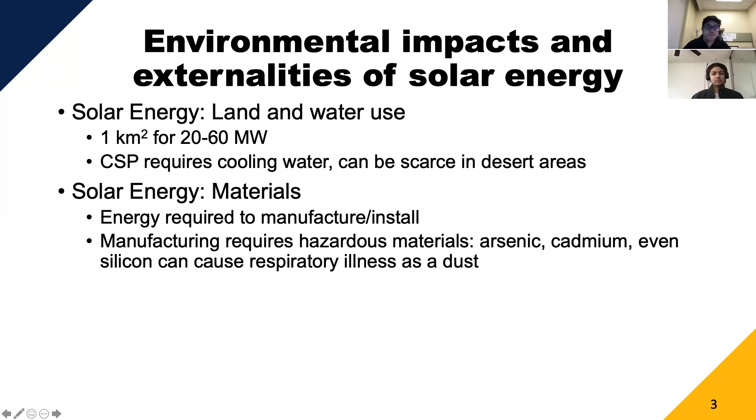This is a common point that some folks will talk about, like bird impacts with wind turbines. It definitely is a thing, although in comparison to other energy sources, it's not as bad. There's actually a lot of wildlife death associated with other means of power production as well.

Siting can greatly reduce a lot of these issues, or help mitigate a lot of these issues.

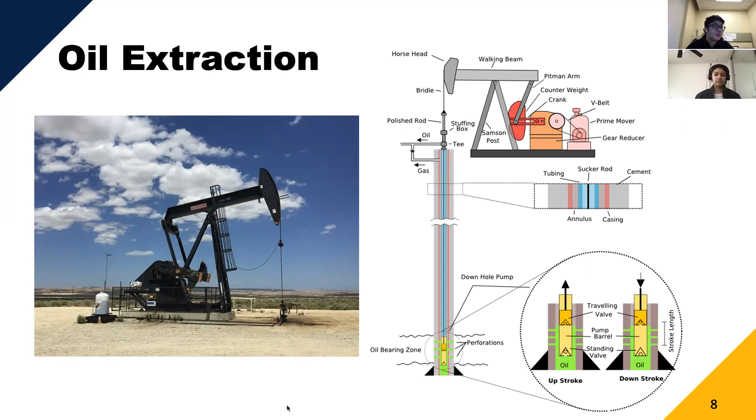That type of oil extraction is known as conventional. It's typically the highest quality and lightest oil. When we talk about lightest oil, we'll see what this means in a little bit, but generally that means you have better derivatives for transport fuels such as gasoline and diesel.

Unconventional oils are a lot heavier, which means the carbon chains within these oils are a lot longer and often tar-like, a lot more difficult to recover since the production and refinement of these resources requires a lot more money inputs. For that reason, the vast majority of current oil production is conventional oil.

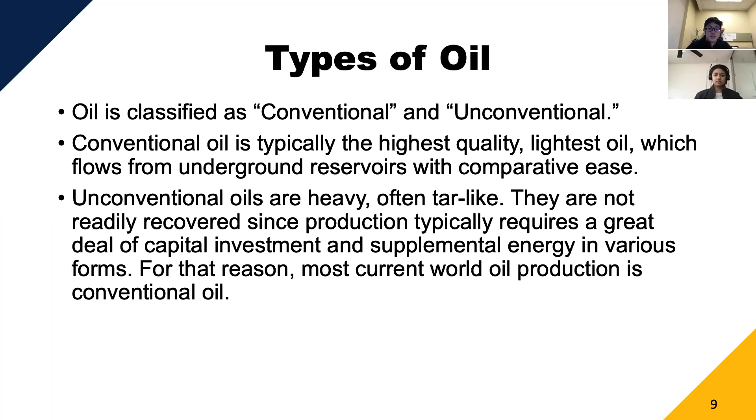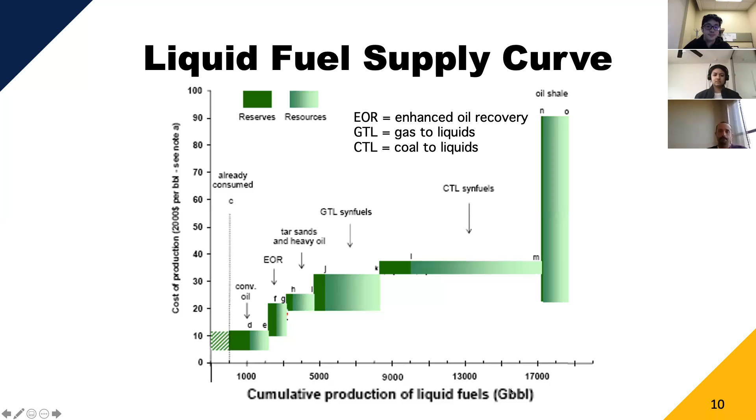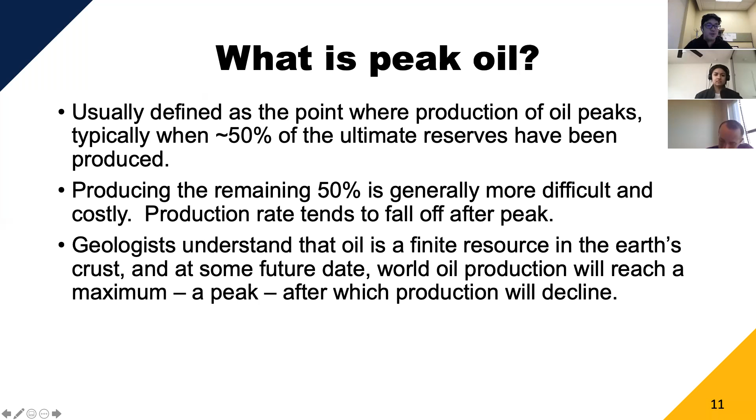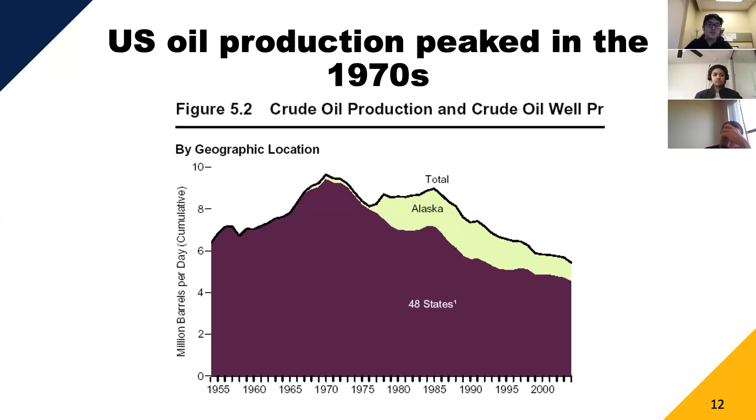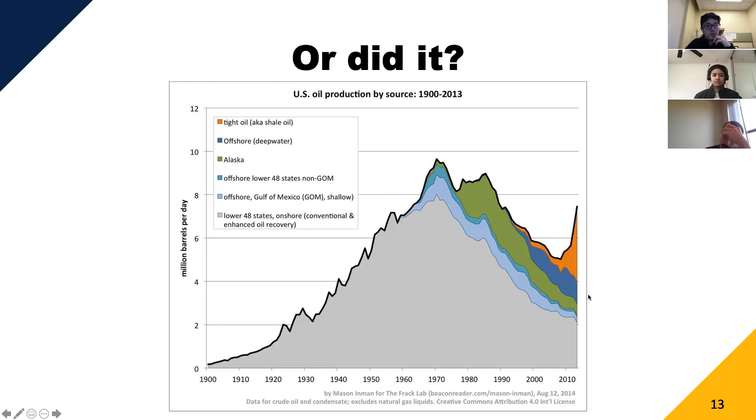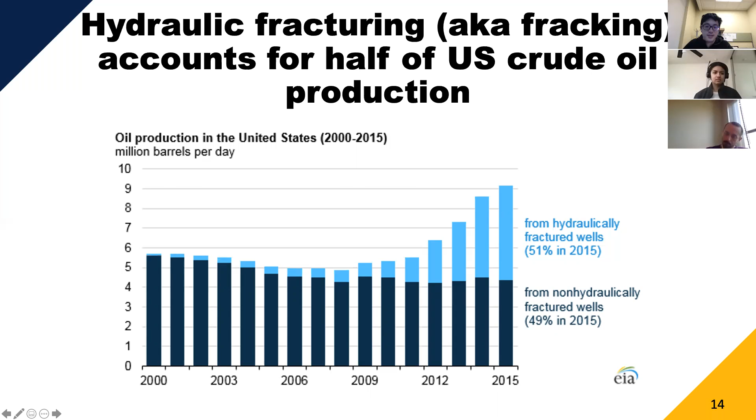One of the things to think about in terms of sustainability is how issues related to conservation can postpone peak oil. This sort of question is particularly important for folks in the oil industry, since it directly affects a lot of their bottom line.

I see a question. Could you go back to the previous slide, where you relate the shocks to oil price shocks and recessions? Can you explain that a bit more? Do oil price rises determine recessions, or?

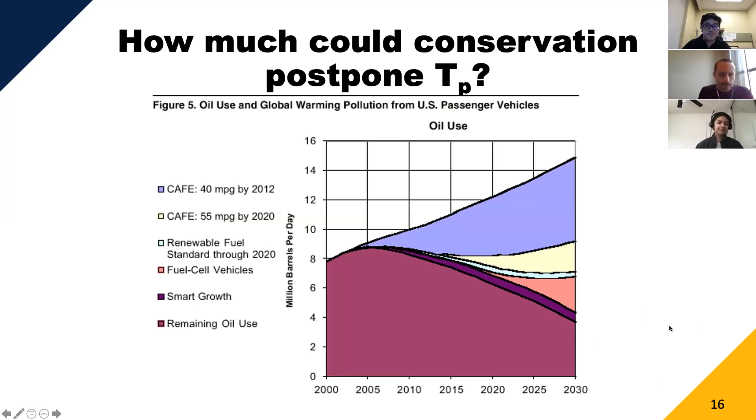But following that period, 2020 to 2021, while passenger travel has not quite reached 2019 levels, freight demand has actually gone up to be quite a bit higher. A lot of people hypothesize that has to do with an increase in deliveries of goods and services. So there was an 18-year low due to coronavirus, but then historic highs now.

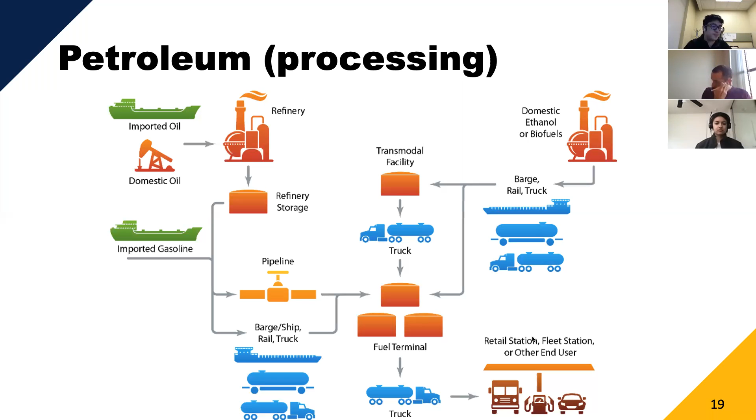Petroleum or crude oil is on average composed of carbon compounds - alkanes, naphthenes, aromatics. We take this crude oil and refine it into several outputs depending on the composition of the starting crude oil. So pentane to octane, carbon chains that are 5 to 8 carbons long, you get gasoline.

And the average barrel of oil is going to yield about 20 gallons of gasoline. This will vary depending on the composition of your starting crude oil. Just as a note, a barrel's volume is 42 gallons, so just about half of that will be gasoline.

Longer carbon chains are thicker and more viscous. This is C9 up to about C16, which gives you diesel, kerosene, and jet fuel. The properties of these fuels are slightly different from gasoline—they're actually more energy dense, and that's why you use these types of fuels in certain applications.

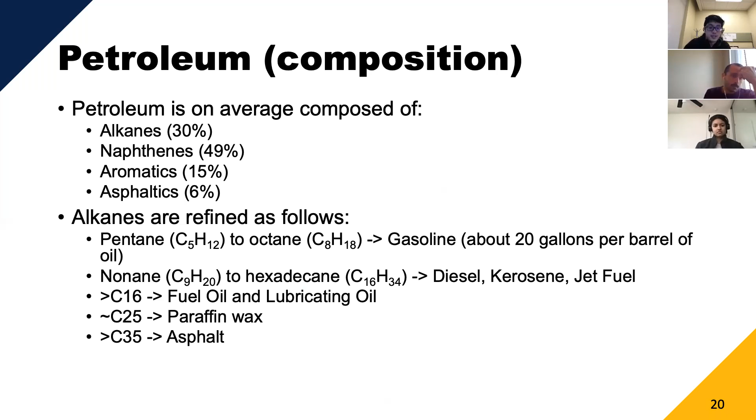Gasoline itself is a homogeneous mixture. It's a homogeneous mixture of small hydrocarbons, anywhere from 4 carbons on the smaller end, usually around 6 to 8, but the range of 4 to 12 can exist, with the really small ones and larger carbon chains being a lot rarer.

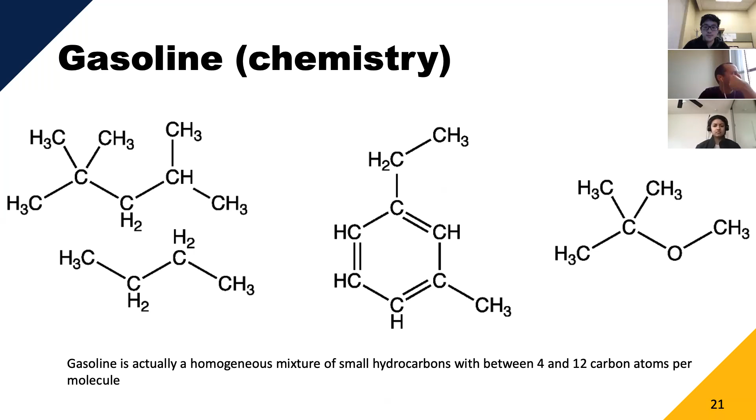Gasoline has an energy density of about 45 megajoules per kilogram. Reserves of oil are around 1.6 trillion barrels, so that's a little less than half of that in terms of gasoline. Note that we consume about 4 times 10 to the 11, or 400 billion gallons of gasoline per year—an astoundingly large volume.

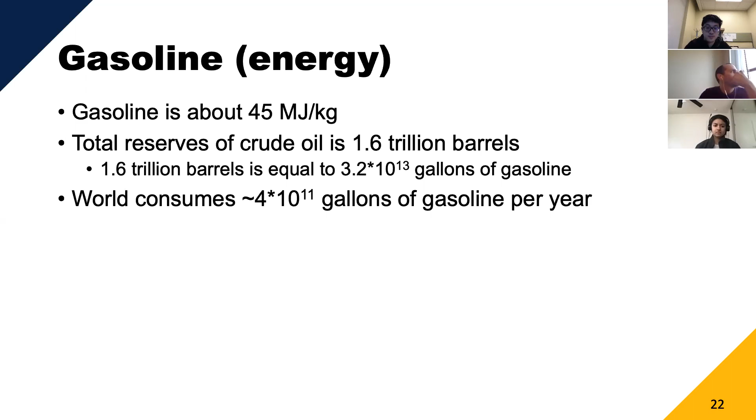Thinking about thermodynamic cycles for petroleum, for gasoline—this is an example of an Otto cycle, which goes through these phases. This is in contrast to the Rankine cycle and Brayton cycle we discussed before. Real world engines don't follow exactly this procedure; it's a bit more complex, but this is an idealized representation of a typical piston engine. The efficiency of these things in theory can reach as high as 60%, but in reality your average efficiency is going to be substantially lower.

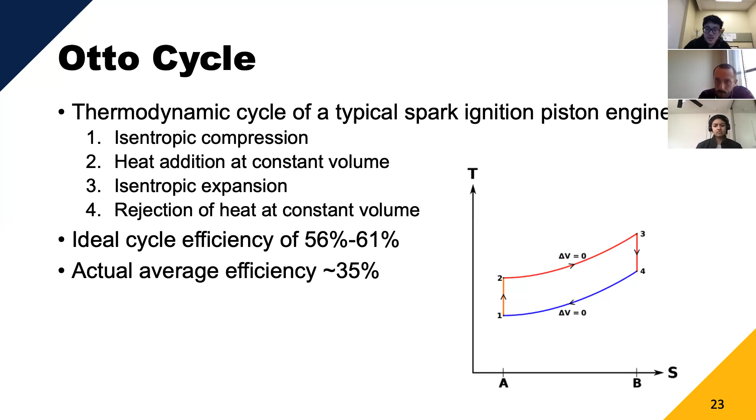Let's talk about how a car engine works. This is a diagram of a typical piston, comprised of 4 stages, hence the 4-stroke cycle. In the first stage, the intake stage, the piston depresses downwards. Simultaneously, the intake port opens up, allowing air to get sucked into the piston. At the same time, the fuel injector will aspirate your gasoline into the piston, since you need a mixture of both fuel and air for combustion to happen.

In the second stage, both valves close for the fuel intake and fuel injector, and the piston moves up and compresses it. Compressing the fuel-air mixture together allows for a better, more efficient combustion to occur.

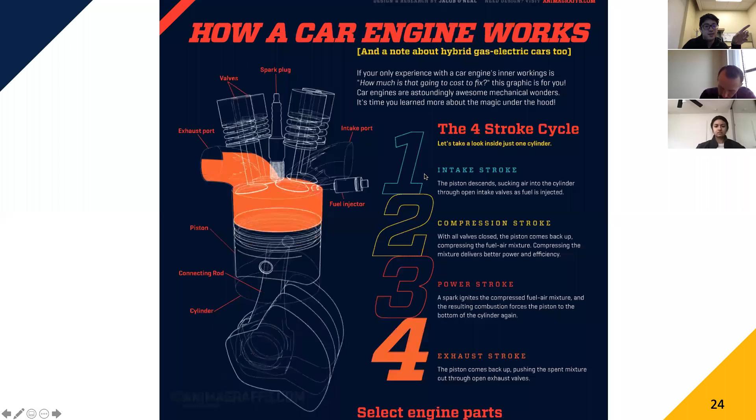The third stage is where you're actually extracting work energy. You've got a spark plug, and what that does is ignite the air mixture, creating an explosion inside the piston. That explosion pushes down your piston and causes the assembly at the bottom to rotate.

In the final stroke, your piston comes back up, and in this phase it opens a different valve going to the exhaust port. As that happens, it sucks out all of the combustion byproducts that happened during your power stroke.

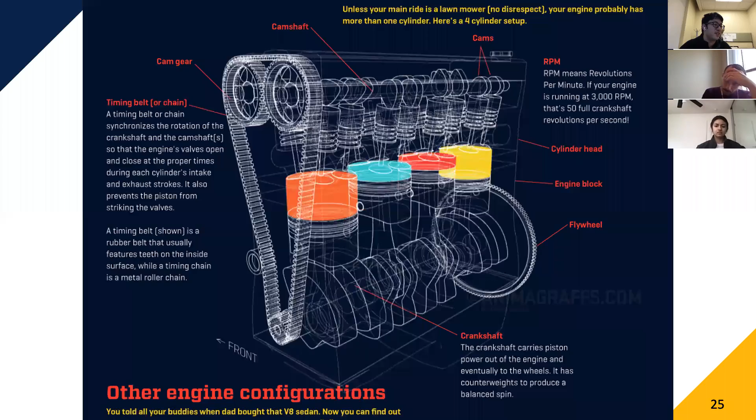These days we use fuel injectors that spray gas into the cylinder at exactly the right moments. If you've got a really old car, you might still have a carburetor, which is kind of like a physical dripping mechanism used to introduce fuel into your cylinders. That's a bygone technology now.

I'm sure everyone has seen this: when you go to the gas station, you see these fuel octane ratings. This rating actually refers to the chemical composition of the gasoline you're putting in. The idea is that higher octane ratings tend to resist something known as auto ignition. So what happens is, if we remember back to that piston diagram, let me go back to it really quick.

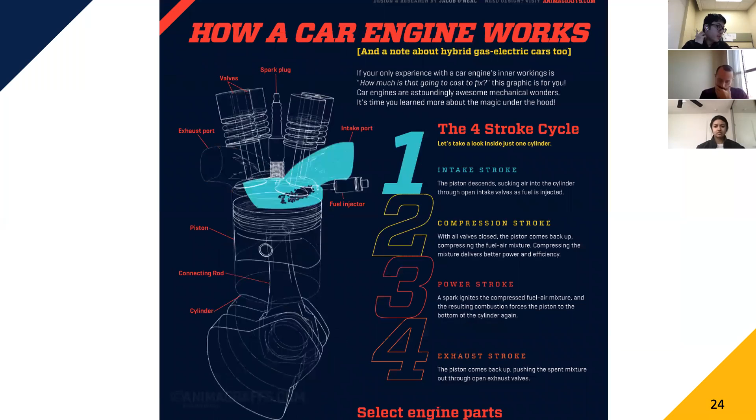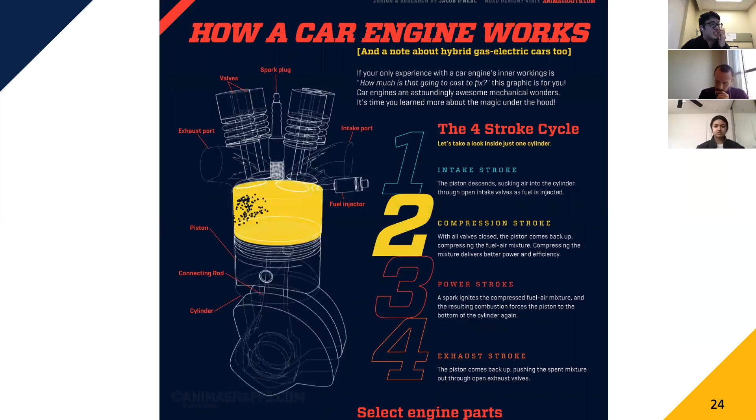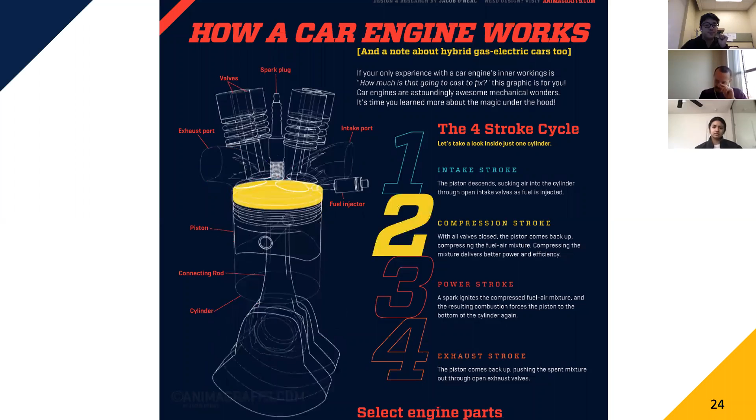One of the things that can happen is, you're basically blowing up gasoline inside of this piston all the time, so the temperature is actually fairly high. In stage 2, during the compression stroke, as it moves up and pressurizes the fuel-air mixture, if the temperature is high enough, it can undergo auto ignition, which combusts the fuel-air mixture before the power stroke. Now the engine is operating not in sync with what you want, and that process is known as knocking.

This really only occurs with fairly high performance cars, where the engine will reach temperatures and have the ability to compress the fuel-air mixture to the point where auto ignition happens. So really only certain types of cars should be using higher octane gasoline. If you're filling up a Honda Civic or something with premium fuel, it's kind of just a waste of money.

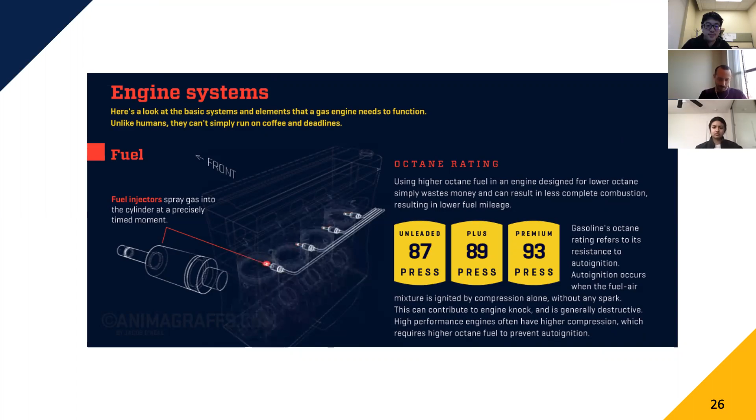So remember that combustion requires oxygen. So imagine the volume of fuel that you're combusting and the corresponding amount of oxygen that would be required. For every carbon atom, you are essentially requiring a single molecule of oxygen gas to properly combust.

So the ratio of gas to oxygen an engine needs is about 1 to 14. Each part of gasoline requires 14 parts oxygen, which means that for a typical vehicle with a 20-gallon tank, your engine will take in 20,000 cubic feet of oxygen. So it's quite a lot.

And then you can think analogously that everything's coming out as carbon dioxide, so quite a large volume of carbon dioxide being emitted.

There is oil that's required for lubrication, making sure that everything is properly lubricated. If you don't have oil, you can degrade the engine and overheat it.

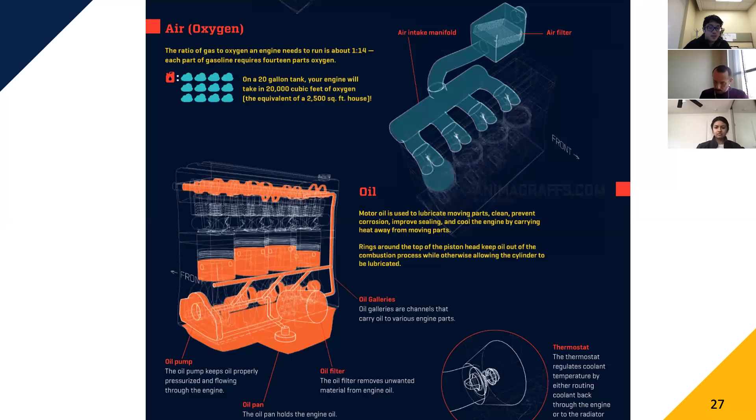Cooling is an important process, that's why you have engine coolant. This comes from your radiator that helps maintain the temperature of the engine and the critical components, both at high temperatures and low temperatures. So there's a whole series of cooling devices to make sure your engine doesn't get too hot when it's operating.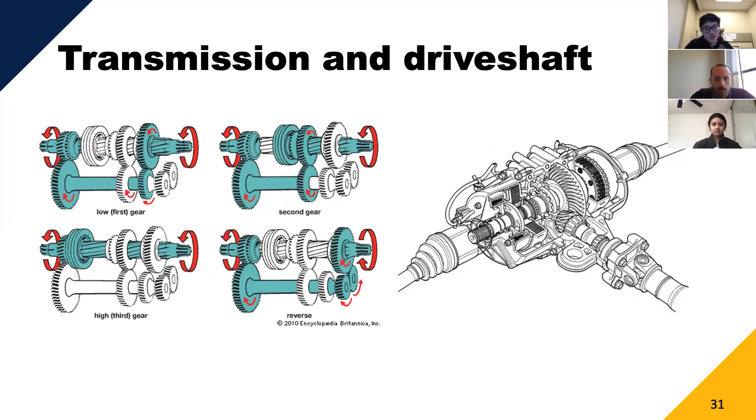So why am I getting into all this detail about the operational aspects of your gas car? I think it's somewhat interesting to know about since so many people rely on it, but also to serve as a contrast for how newer alternative fuel vehicles work. Thinking about electric vehicles and hydrogen vehicles, if you've seen electric vehicles out on the road, they look like your average car. But what's under the hood is vastly, completely different than the world of internal combustion.

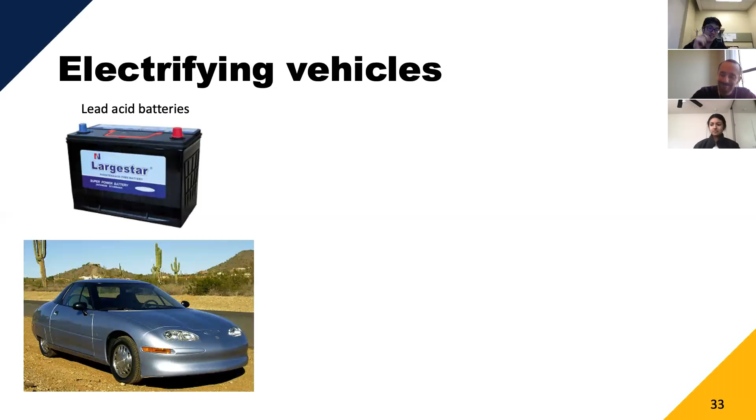The next evolution in battery technology is known as nickel metal hydride. When we think about the Toyota Prius and hybrid vehicles for a long period of time following the Prius, I'd say for the next decade and a half, they used these batteries. These nickel metal hydride batteries are better in terms of power and energy density, but still not enough to solely power the drivetrain of a vehicle, at least not for long distances. But they're great at allowing hybrid vehicle technology to flourish.

And lastly, lithium ion batteries, the commonplace battery for modern day electric vehicles, with much higher energy and power density, allowing for explicit powering of your vehicle's drivetrain.

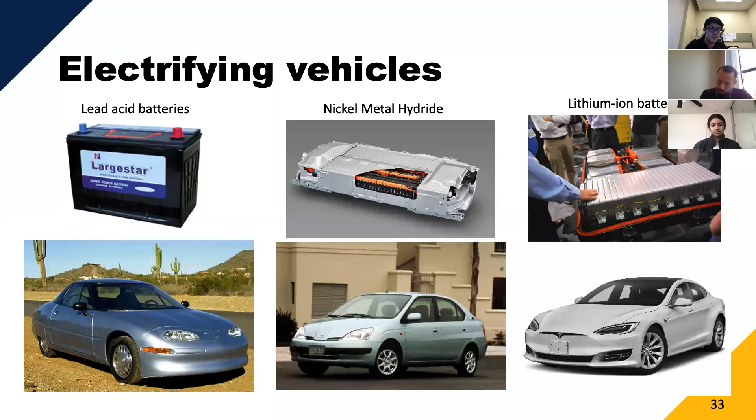So how do batteries work? The important thing to remember is that batteries are a form of energy storage. They don't actually produce energy themselves; you have to put in energy to get energy out. Essentially, you have an anode, cathode, and electrolyte, and it uses the potential energy difference in the concentration of positive versus negative in your anode versus cathode to allow for production of electricity as you let electrons move through your circuit.

Your lithium ions essentially move back and forth in the electrolyte, and this movement is what allows electricity to flow.

Think about how energy dense gasoline is - about 45 megajoules per kilogram. In order to compete against that, this new form of energy use has to hit a sweet spot in terms of the size and weight of the batteries, which was one of the large issues in earlier generations of electric vehicles. And it's still an ongoing issue, especially as we think about electrifying heavier and heavier vehicles.

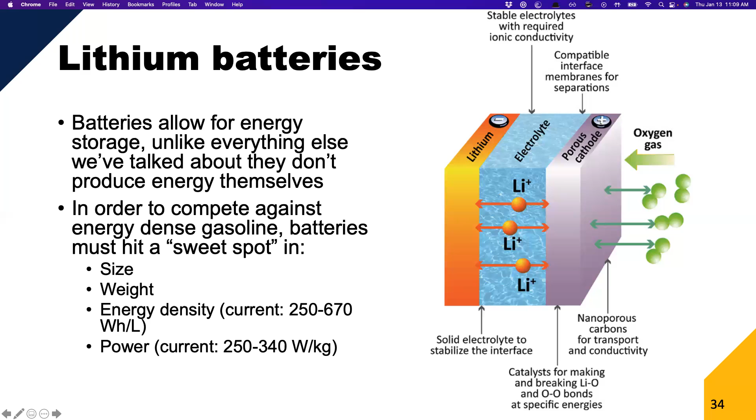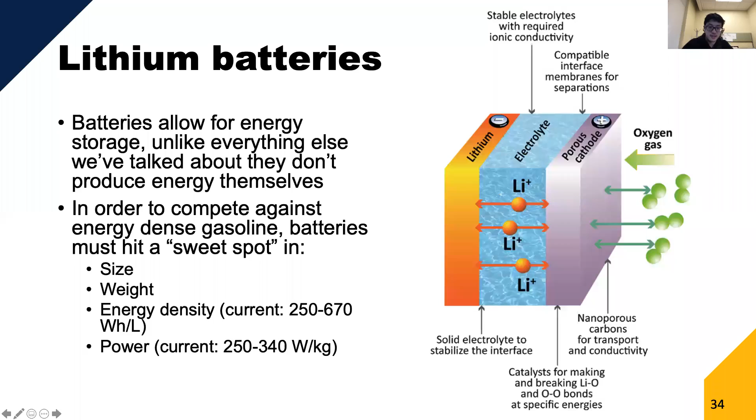Okay, so let's continue onwards, thinking about lithium battery economics. This is a pretty famous paper that came out in 2014. It was published in Nature Climate Change or Nature Communications, one of those two. And essentially what the authors of this paper did was they went around and asked a bunch of experts and a bunch of industry experts.

You can see they talked to companies like Nissan and Tesla and looked at other research journals. Basically they did this compilation of elicitations to understand where the price, or the cost for batteries, was per kilowatt hour in the past. And so you can see this broad range of costs.

They also tried to elicit future costs from these experts, both researchers and industry leaders. You can see that in these triangles, showing where we expect these costs to be in the future. At the bottom of this plot, there's this red shaded area that starts at $150 per kilowatt hour. If you were embroiled in the world of EV research at the time, this $150 per kilowatt hour at the battery pack level is the magic number for what battery costs would need to be in order for electric vehicles to essentially break even with a gas vehicle.

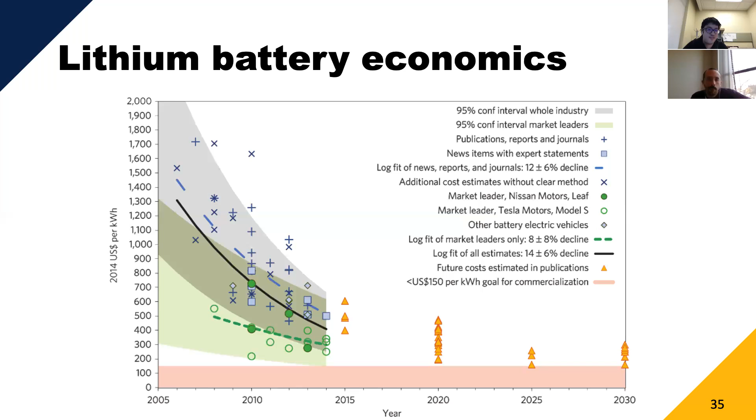This is to provide some sense of battery production capacities. Note that this figure is actually quite old now for these sort of standards, but I haven't been able to find a better update. It gives you some sense of the volumes we were talking about back in 2014. You can be sure that all of these bars have definitely moved upwards, with a lot more production from gigafactories and that sort of thing.

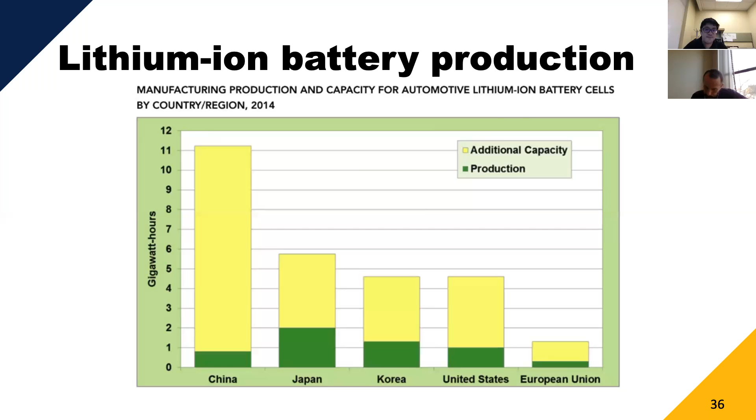Thinking about all of the parts of your gasoline engine, in contrast, electric vehicles are way simpler. Instead of your engine, which is comprised of all these different moving parts—your piston, your crankshaft, your timing belt, your camshaft, the cams—going into your large scale transmission system and drive shaft, you can think of all the moving parts there. In an electric vehicle, you've basically got your motor and your drive shaft, and that's pretty much it. Those are your only moving parts in the vehicle.

There's a much larger battery pack to provide electricity for your motor. You do have kind of a built-in transmission system in the motor, but it's fairly different from your traditional transmission system. You don't really have gearing, and you don't have to shift gears in order to power your electric vehicle.

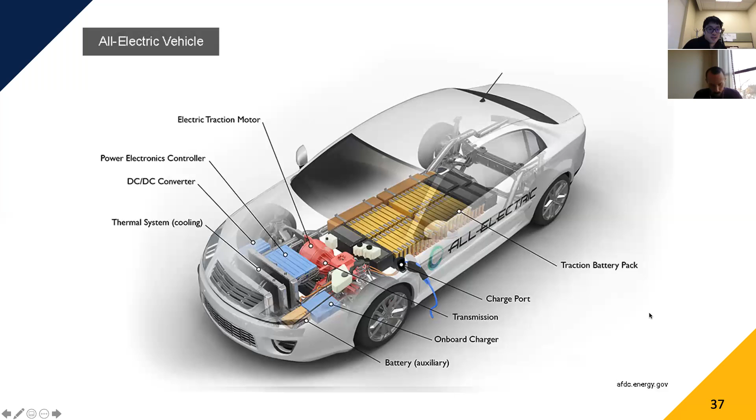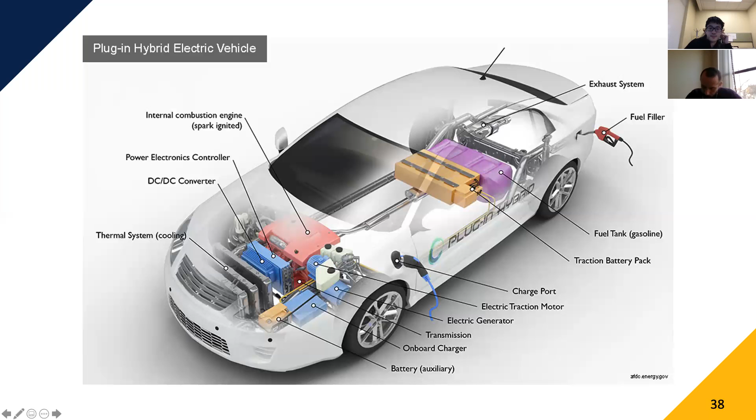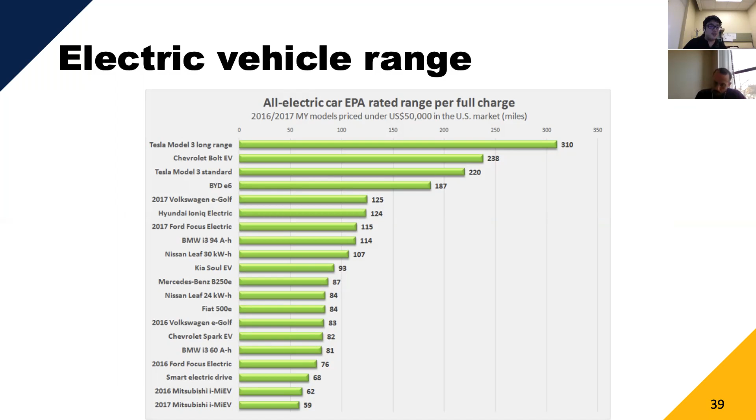ranges that go anywhere from 60 miles all the way up to above 300. Nowadays, the longest range vehicle is the Lucid Air, which is over 500 miles of all-electric range.

The trends in range and battery sizes have typically trended upwards. So you can see at the beginning, your earliest instantiation of a Nissan Leaf was at 73 miles with a 24 kilowatt hour battery, but now there is a 40 kilowatt hour version at 150 miles.

There's actually a Nissan Leaf Plus, which has a longer range than that - I think it's a 60 kilowatt hour, so something like 230 miles of range. All of the ranges for the earliest generation of vehicles has now been really surpassed when looking at some of the more popular vehicle models, the Teslas, the Mustang Mach-E, which are in the hundreds of mile ranges.

Any questions about these electric vehicles so far?

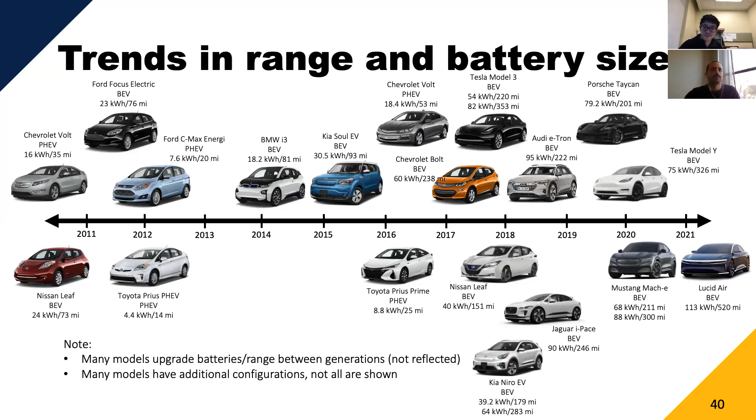So going back to plug-in hybrids, I was talking about the operational aspects of this. There are actually several different setups. They're fairly complex in the way you can arrange these configurations, but generally you've got three types: series, parallel, and series-parallel plug-in hybrids. Let's look at how these operate.

In a purely series plug-in hybrid, you have your battery connected to your motor that operates the drivetrain. In electric mode, you have your regular setup, and when you turn on the engine, in this case the engine is not connected directly to the drivetrain. Unlike a gas car, which would mechanically rotate your drive shaft through a series of connections to your engine, this powers a generator, which will power the battery. The motor will only operate through the battery, so the engine can never cause the wheels to spin - it can only power the battery.

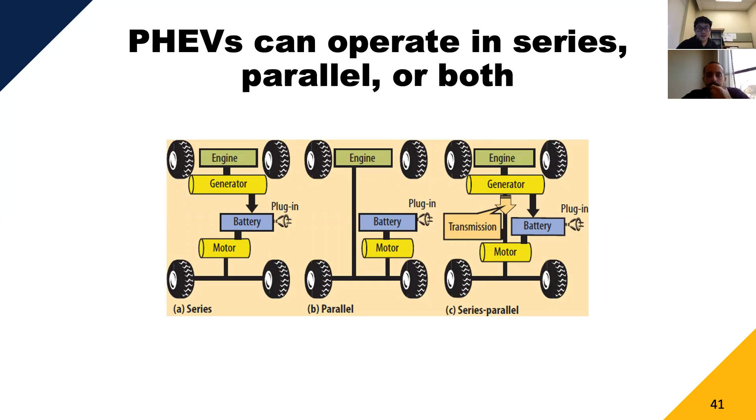Yeah, so refueling - this is a common topic in people thinking about electric vehicles. With a gas station, the argument is typically like, oh, I can fill up my car in a matter of minutes, right? It's much faster than charging the electric vehicle.

And so that is true, but it also discounts this really different world of the way people employ charging. If we think about a gas vehicle, the typical pattern is that I drive my vehicle until it's close to empty on gasoline, and then I go to the gas station and refill. The thing with electric vehicles is, I actually have the availability of charging my car in a whole multitude of places.

I can charge at home, I can charge at work. Actually, I have an electric car charging for free at work right now, which is a pretty big perk of free workplace charging. There's lots of different places you can charge, like grocery stores or when you're going out to eat. There's inherent convenience built into aligning the refueling of your vehicle with the destination you actually want or need to be going to. If you ask a bunch of people how much they enjoy going to a gas station, I've never heard of someone who really likes traveling to gas stations to refill their car. So there are a whole lot of benefits that get discounted when thinking about electric vehicle charging.

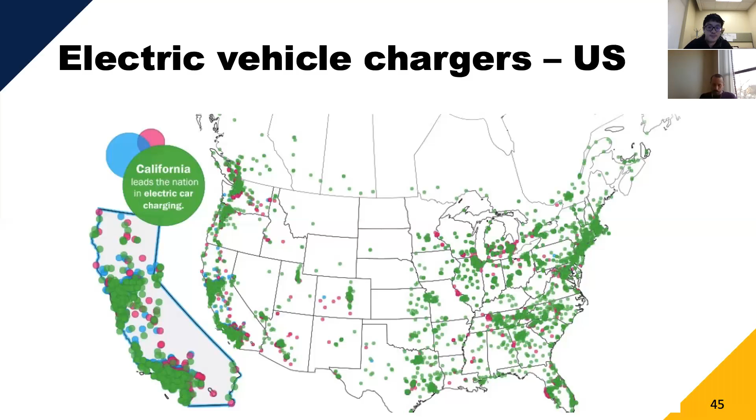Okay, so the last thing that I'll mention about the chargers is these 350 plus kilowatt chargers. We'll kind of refer to these as extreme fast chargers. And the whole point of this type of charger is to try and replicate the gas station model.

At 350 kilowatts, you're talking about fully charging a 300-mile vehicle within say 10 minutes, right? And so there are actually already some examples of these stations being deployed. There's one in the Bay Area, for example, and this can charge your vehicle at extremely high speeds.

The power is extremely high. The cables actually need to be liquid cooled to maintain the temperatures. This is definitely not something you'd want to subject your vehicle to every day, because actually it will accelerate the degradation of your battery a little bit.

And so this is potentially an area in the future where we would see these kind of taking the role of a traditional gas station. Right now, I will note though that there is no existing vehicle model that has the capability of being charged at this high of a power. So keep that in mind.

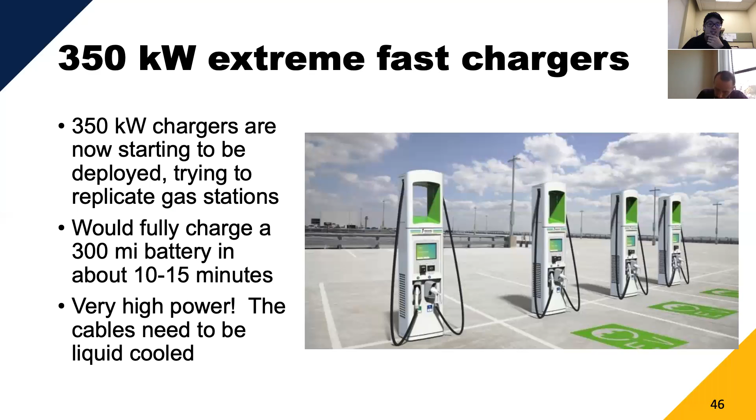Okay, so let's talk about a different type of electric car, and that's for hydrogen. So hydrogen is a sort of similar technology that employs hydrogen fuel in order to produce electricity.

And that occurs through a process known predominantly as steam reformation. So this is where you take methane combined with water, and it produces carbon monoxide and hydrogen, and you can recycle this carbon monoxide to produce slightly more hydrogen. And you'll notice here that for every 4 molecules of hydrogen, you're still generating CO2.

So this process of steam reformation is still environmentally unsustainable in the sense that it produces greenhouse gases. So this form of hydrogen production would not be considered, I would say, necessarily green.

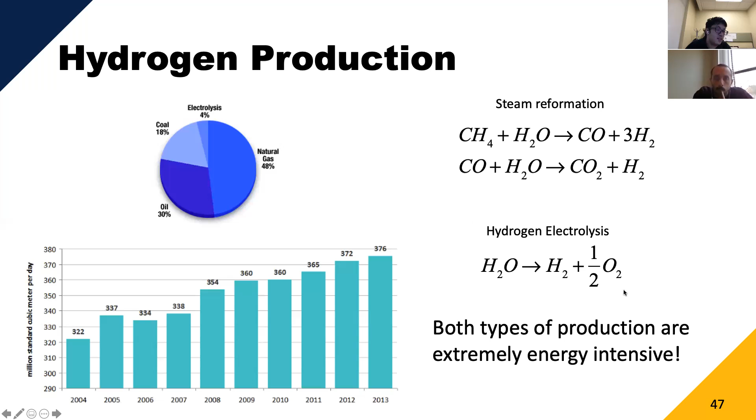There's also hydrogen electrolysis, where you take water and you split it into hydrogen and oxygen. But this process is fairly inefficient and takes a lot of energy to do.

So once you have the hydrogen gas, the way that you extract energy out of it is the exact opposite of the electrolysis reaction, where you combine hydrogen and oxygen to produce water. This is an exothermic reaction, so it produces energy, and this is taken advantage of in a fuel cell.

So you have an anode, a cathode, and an electrolyte, so this looks pretty similar to a battery. The fuel cells typically contain what's known as this proton exchange membrane, usually with some kind of platinum-based catalyst, that allows for this process to happen at a lower initial threshold energy in order to get the reaction going. By transferring the protons, it allows for a flow of electrons through your circuit and produces electricity.

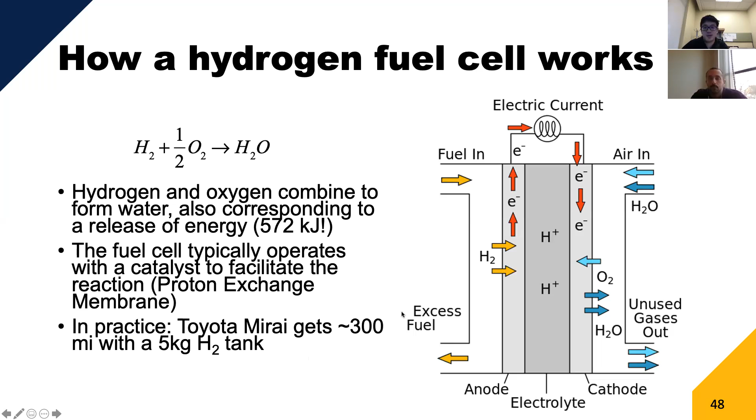Layout of the hydrogen fuel vehicle: it's very similar to a battery electric vehicle, and in fact it does itself have a small battery pack. But the main way that it's powered is through a fuel cell stack, which takes your hydrogen from your fuel tank to produce electricity. The rest of the components look pretty much identical to an electric vehicle.

You do still need your electronics controller and a converter in order to get the right form of electricity, because coming out of the fuel cell is going to be DC power.

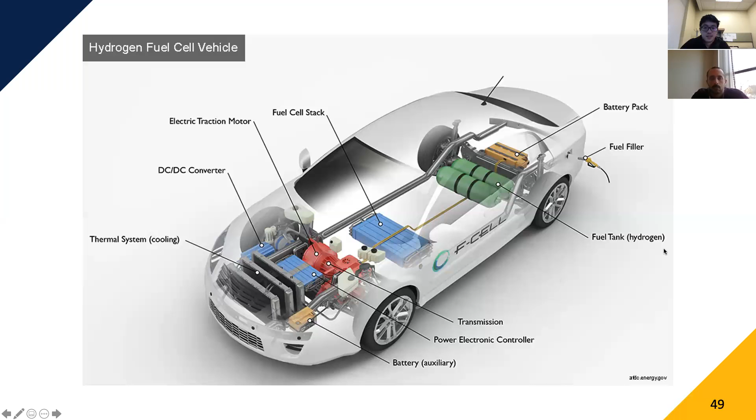So we'll end the day looking at some of the environmental impacts of our various transportation modes. The obvious ones for fossil fuels we've talked about this a bit already. Drilling and producing the oil has a variety of localized environmental impacts on your ecosystem, disturbing both the land and marine ecosystems.

And there are a whole lot of improvements in the way these are happening now to try and minimize some of these impacts, so efficiencies of exploration and drilling activities, using satellites, GPS, remote sensing, and seismic technologies to reduce the footprint of exploration when looking for your fuels.

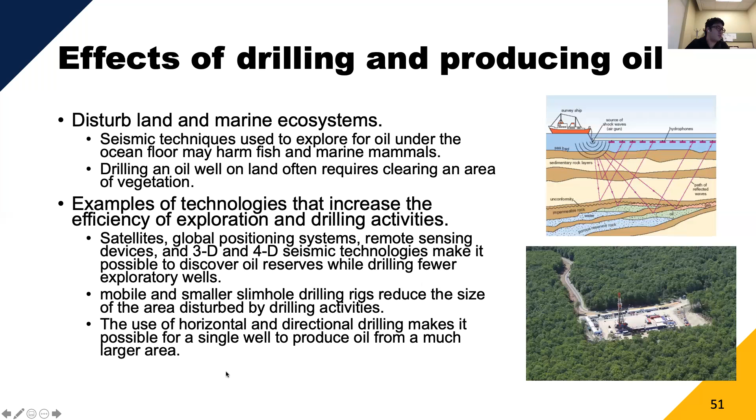Some of the environmental concerns with hydraulic fracking: we talked about this a little bit. It uses a very large amount of water in order to release the oils and gases. A lot of the wells, if they are faulty in the way they are constructed or handled, can result in leaks and spills of some of these fluids, which is particularly dangerous if these things leak into local watersheds.

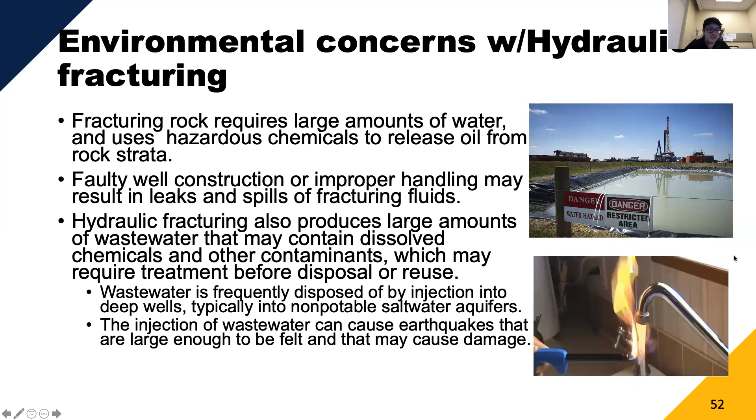So you can have wastewater that contains dissolved chemicals and contaminants, which you can no longer reuse and need to be properly disposed of. This is a real life example where leakage into a watershed actually ends up putting enough hydrocarbons into your water to make it flammable - probably not something you want to be drinking.

Oil spills: this is usually accidents at the well or with the transportation aspect of it - pipelines, ships, and trains - as you move oil from your mining points to refineries. Lots of big issues with this, obviously.

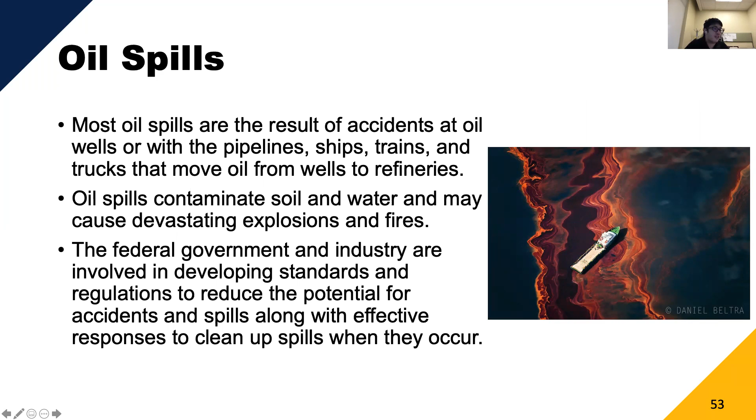When we look at some of the historic oil spills, we can see how these compare. If you guys recall, a little over a decade ago, there was a huge accident at the Deepwater Horizon in the Gulf. If you watched the news at the time, you could see over the period of 3 or 4 months where oil was just continuously getting leaked into the Gulf from their drilling operations.

Actually, I think I have a picture of that. So this is the largest oil spill to ever occur in US waters. Over the course of 5 months, it leaked about 5 million barrels of oil, a stupendously large volume.

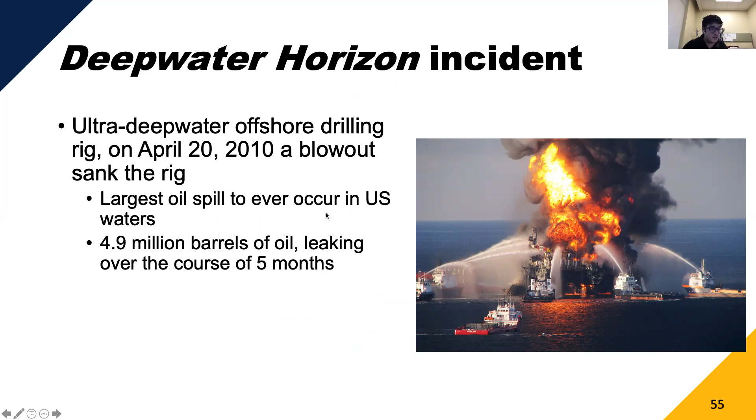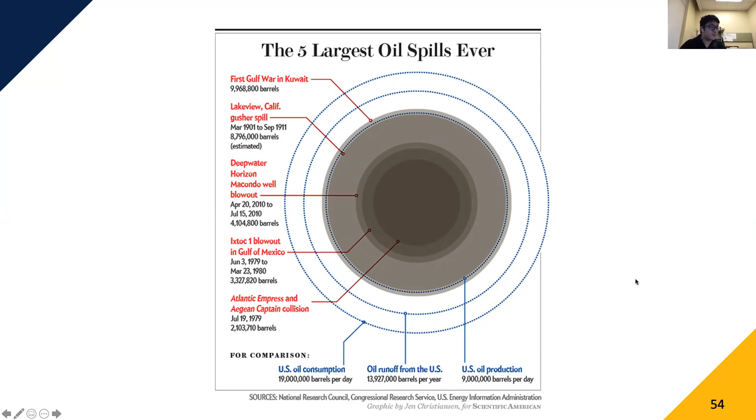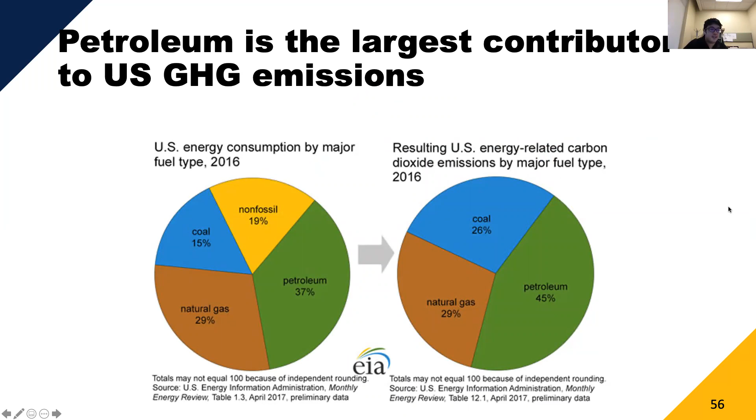What about for electric cars? What happens when we plug in our car? It is true that an electric car has no tailpipe emissions, because using the battery doesn't lead to byproducts like you would with combustion of fossil fuels. However, this electricity is coming from something, right?

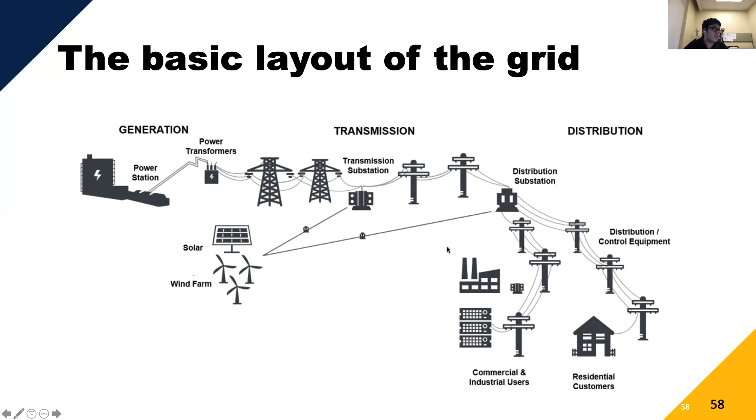So we saw this before. The question is whether or not when I plug in my car at home or at work, this electricity is being powered by renewable sources such as solar and wind, or is this being powered by, say, a coal plant or a natural gas plant? This is a very rich area of research—actually where a lot of my own research work lies. And this depends primarily on where you are charging and when you are charging.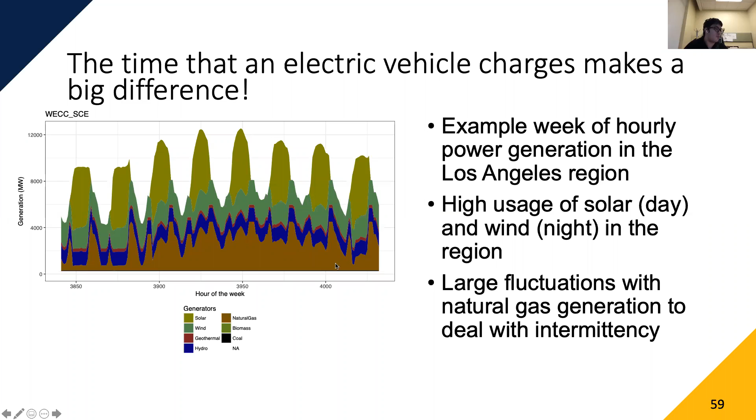And then you can actually see what power plants are providing that power. So here in Southern California Edison, you have a bunch of solar during the day, some wind power, and then a lot of the base load from natural gas and some hydro. So if I charge my vehicle during the day, you might mainly be using solar, but if you're charging at night, that power could be coming from a combination with a higher proportion of natural gas, for example.

In terms of the best time to charge, this could be really different depending on where you are. If you're in New York, you'd want to be charging at nighttime, in the middle of the night, to minimize emissions, versus if you're in California, you'd want to take advantage of solar charging during the day.

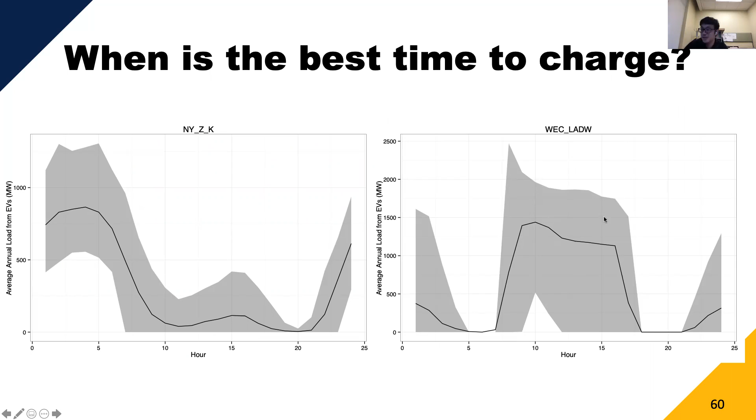Last little bit here, thinking about vehicle to grid. V1G is unidirectional. Instead of discharging from your battery back into the grid, you could do what's known as smart charging, where I could receive signals saying, oh, maybe we need a lot of power at a certain time, so please stop charging—or a different type of environmental signal.

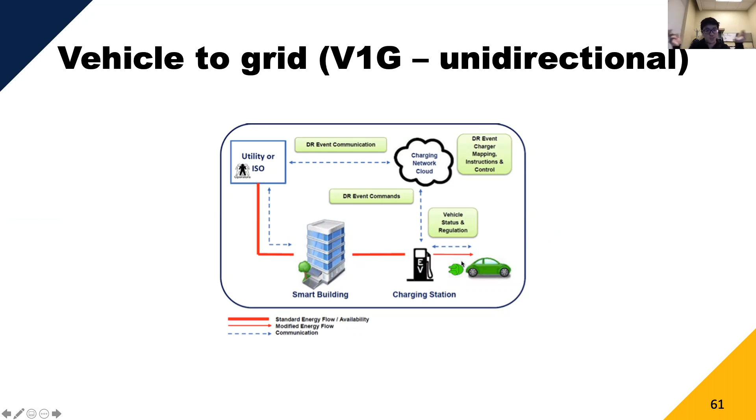It might say, right now the grid is primarily on solar energy, so please charge your vehicle now. This is where you receive some kind of signal that allows you to charge your car at more ideal, cheaper times. Then there's bidirectional charging, where I receive signals saying electricity costs a lot more money right now, so I'll actually sell the electricity stored in my vehicle back to the grid. Then when electricity is really cheap, I'll start charging my vehicle again. There are lots of pilots and schemes testing these kinds of programs for broader future use.